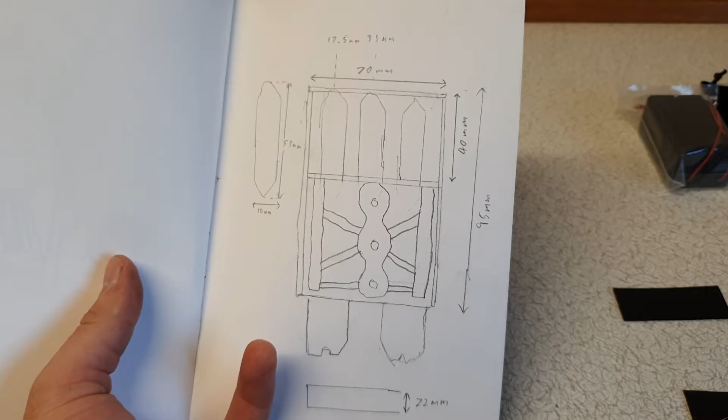So the plan is to create some sort of crystal power pack. I have the outer case along here, and inside it will have 3 crystals illuminated by a blue LED, which is then powering the entire suit slash costume that it will be attached to.

First thing I'm going to do is take this here off of the plastic. Hopefully this is relatively straightforward and it's not too much of a pain. Okay, a little bit more challenging than I thought, but managed to separate these 2 bits out.

So the plan next is to see this edge here. It's a bit sharp, so I'm going to use some sandpaper, sand these edges down here and here, and then utilize this bit here, which I'm going to call piece A, and then I'll glue that onto the side like so. The next thing I'm going to do now is sand this piece down, get the sides together, sand it down nice and evenly, trying to get a nice flat edge to attach the other bit of plastic to.

Okay, now that the edge is a lot smoother, hopefully you'll be able to glue something onto that piece. So I'm going to get piece A here, place it onto that, nice and flush, and then glue that down. Obviously it's going to be a bit more difficult with the plastic kind of wanting to spring out.

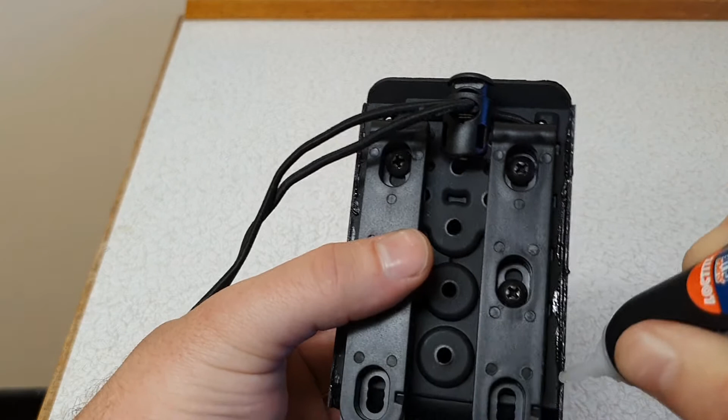Right, voila. Now that, hopefully, is going to do the basis for the body. Now I'm just going to set that to the side to dry while we work on the rest.

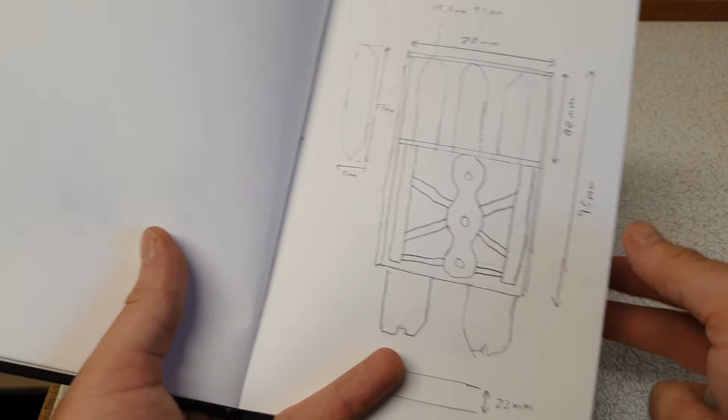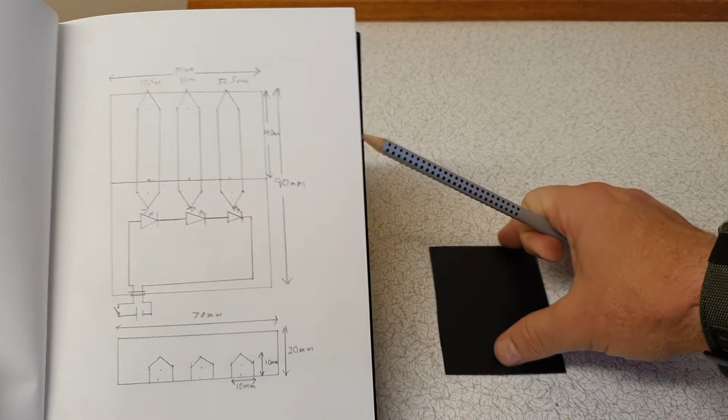Now that I've got the body done, so it will be this kind of outside area here, the next thing to do is build the chassis in the middle. So this is going to be where the crystals sit with the LED circuit coming out to the battery pack. So I'm going to build this on top of here, the idea being that I can then slide it in and out of the case at will, being able to work on it if needs be.

So I may have to do that after I get more glue because I seem to have used it all already. It's a new dawn, it's a new day, and I have some more glue. Wonderfully.

So I would have preferred to get the glue which you can get with that kind of almost long needle point nose, so you can get into nooks and crannies, but this is all I can get in the local shop since everything's locked down in the lockdown. So, plan is to do next is...

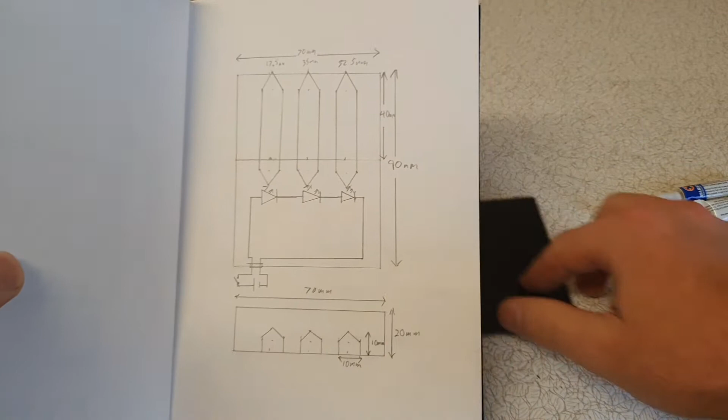So let's build the chassis. I'm going to get this, and basically this is then going to slot into this. Then I'm going to cut that down to where it needs to be, and I'll make the whole thing a lot easier. So wish me luck.

Part A was the side bits. I'm going to call this part B, the flat chassis bit, and part C, and now I'm going to glue it onto the top. So this here, going to work from the top down.

Voila. So I'm going to work from the top down, build this top bit, then the side supports, and we're going to glue in the crystals to keep them in place, and then put the bit over the top, which will hopefully lock it in place. Then attach the LEDs, and then build the circuit. Wish me luck.

Right. That's not what I planned. Aha! I figured it out. And just need to hold this in place.

And I've glued my fingers together. Wonderful. I'll be back. Okay, now to keep this in place, I'm going to use these here, which will be part D.

Add a little bit of glue, like so, and a bit more up the top. Take this piece, and glue it down nicely. So don't worry about being too perfect.

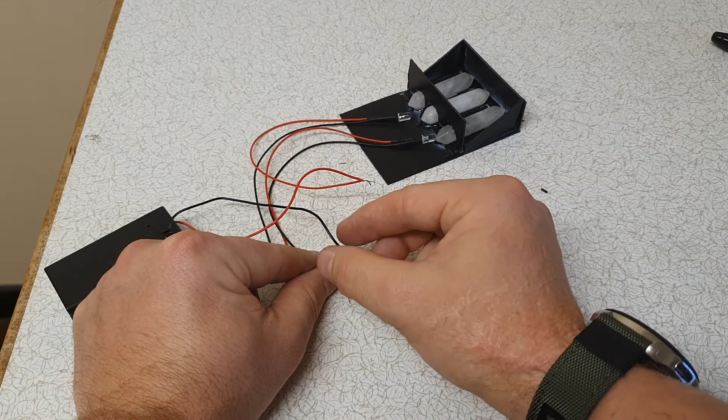Now just wait until that sets. Now that I've got most of the chassis built, it's time to try and sort out the wiring. So I put together a small bit of test circuit. Voila. So that should light up the crystals, and they should glow with their power pack.

I'm now going to glue down an LED at the bottom of each crystal. That's to hold it in place while the glue sets.

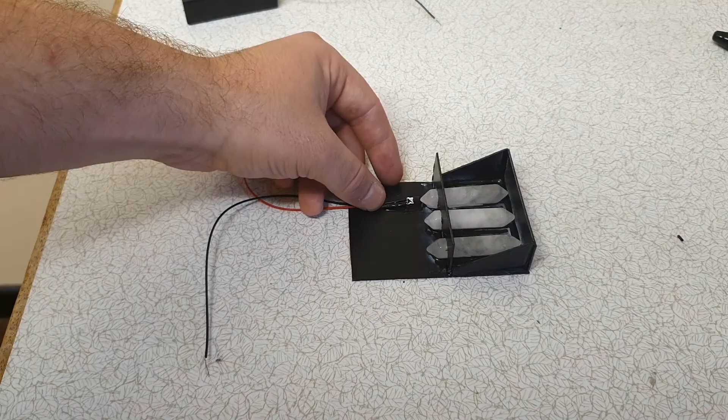Okay, now that I've got all the LEDs glued in place, I'm going to cut the wires and wire it all together. Ultimately, I'd like to solder all the wires together, but I don't have a soldering iron, so I'm going to have to use my imagination and just see what I can get to work.

So after that's all done, I'm going to get the case. Cut this down to the right size, so then they have the crystals poking at the top, wire it all together, light it up, and hopefully it's going to look amazing.

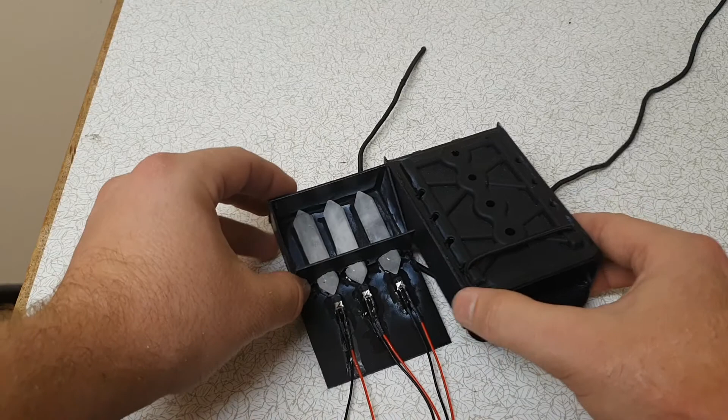As you see now, I've got everything ready, basically wired up, so if I can just connect these two wires together, voila, we have liftoff.

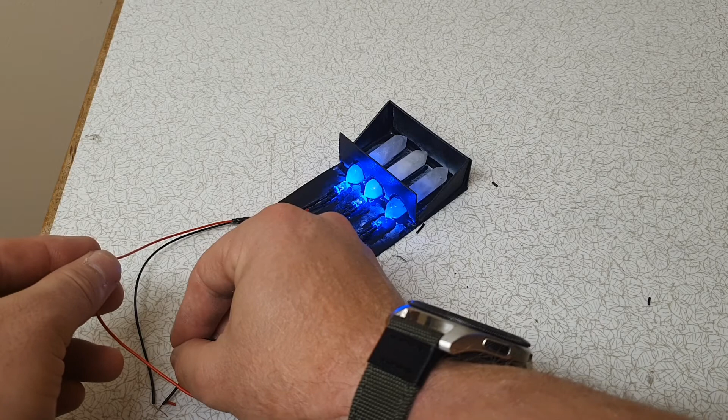So now that that's done, just to get this chassis into here. Plan is now to trim off this section up to where it meets out there. This will slide in, and we should have one finished product.

I'm going to use this trimmer now to obviously do most of the cutting. We're going to do most of the cutting off camera because it's a bit safer, and obviously safety first.

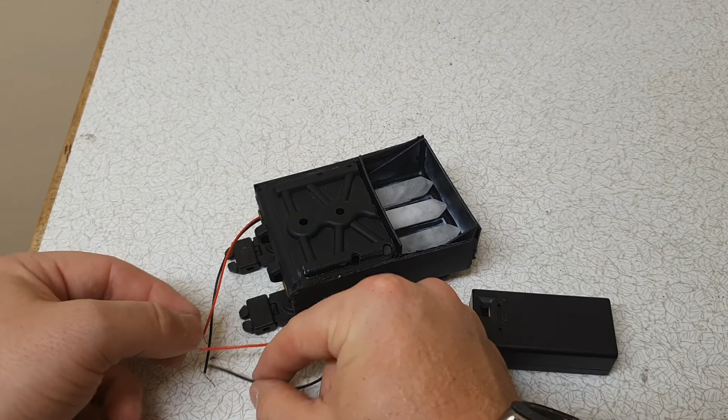We've got it all assembled. Now for the test. Voila, it works. So I just need a little bit of refinement. Well, I think we have success.